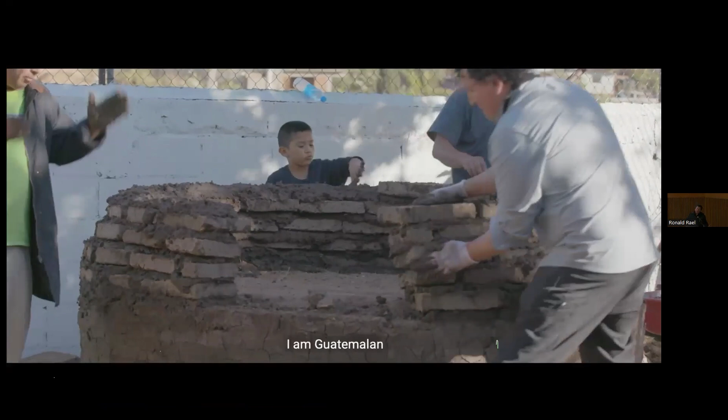I had the opportunity to build one of these ovens in a migrant shelter in Nogales, Sonora, part of a documentary film called Pedacito de la Tierra, which documents the construction of this horno, which allowed people from that community during the pandemic to have a little piece of home within that shelter. Some of them were there for almost 2 years.

Children were born there, and they could gather around this horno, people from many different countries and languages, to share stories and recipes and to create a community of their own. That horno is still in use, and they bake over 250 loaves of bread every 2 days in this oven.

Earth is an important part of my architecture practice, and several years ago I designed what was one of the first mud brick buildings to be built in Marfa, Texas, in over 100 years. A project that looked at both traditional and contemporary technologies. I call it the box house. It's a box within a box of mud and a box of infrastructure inside.

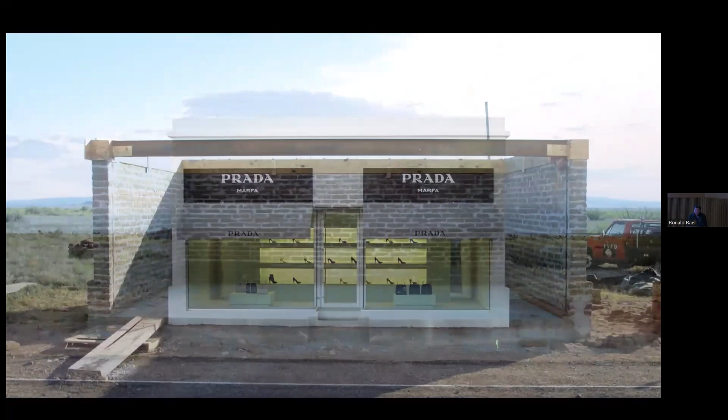And Prada Marfa, also nearby Marfa, a project that looked at the political implications of using earth as a material, each brick cast in a cementatious mortar, similar to how the US military constructed their forts along the contemporary US-Mexico border after the Mexican-American War in 1848.

And to think about how these works transcend their objectness as cultural objects when they enter into the public sphere and take on a dimension of cultural meaning beyond the object itself, beyond the architecture itself. Perhaps Prada Marfa was the first project that demonstrated to me the difference between architecture and art, but also blurred the boundaries between those two disciplines.

Much of this work culminated in a book I wrote in 2008 called Earth Architecture, that discussed how earth is a 21st century building technology, and discussed the contemporary history of earthen architecture. But in the last chapter of the book, I speculated on what would be the future of earthen construction.

I had many thoughts about this related to the internet and the dissemination of these technologies, but also in 2008, 3D printing seemed to be something that was catching on. And I thought 3D printing might be the future of earthen construction. Very quickly I thought, well, maybe I could be the person that does that.

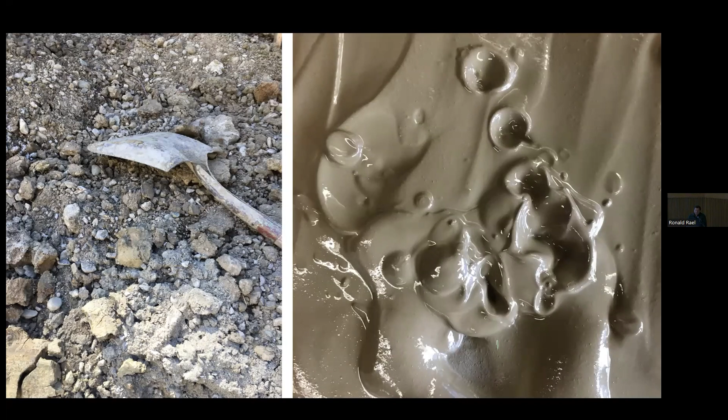That developed into a project where, working with the ceramics department at University of Texas, El Paso, and the geology department there, as well as 25 ceramicists from Juarez and El Paso, we embarked on searching for the clays of the borderlands and to have a discussion around the historical use of clay in that region, and to think about this idea of how earth connects us.

We developed a software so that anyone could replicate the techniques we were employing to make those pots, because a ceramic artist at that time especially didn't have time to learn how to 3D model and 3D slice and 3D print. So this is now a software that's sold and used in institutions all over the world, but it makes it very easy to make these objects.

With these ceramic artists, we collected the clays of the borderlands, and we thought each ceramic artist would make one object, but they ended up making 250 over the course of the project. These beautiful clays of the various complexions that were found.

These technologies developed into ways of thinking about architecture as well.

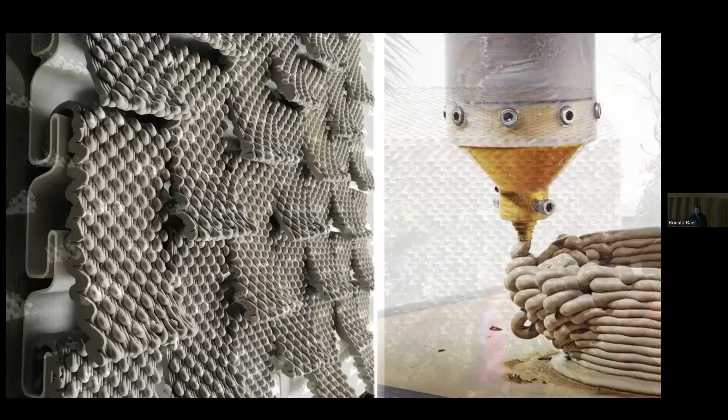Over 3,000 custom 3D printed ceramic cladding units for an accessory dwelling unit in Oakland, California, after the relaxation of regulations about not having to use an architect, employ an architect, or go before the planning board to build up to 1,200 square feet in one's backyard. It was an exploration of the technologies we were developing around 3D printing with clay, but also employed many of the other materials that were a byproduct of thinking about what materials exist in the landscape, in the same way that an adobe is made from the earth material around us.

In the San Francisco Bay Area, we could find sawdust from the Sierra Nevadas. We can find salt from the San Francisco Bay. We could find recycled grape skins from the wineries in Napa Valley to create a 3D printed facade using those materials.

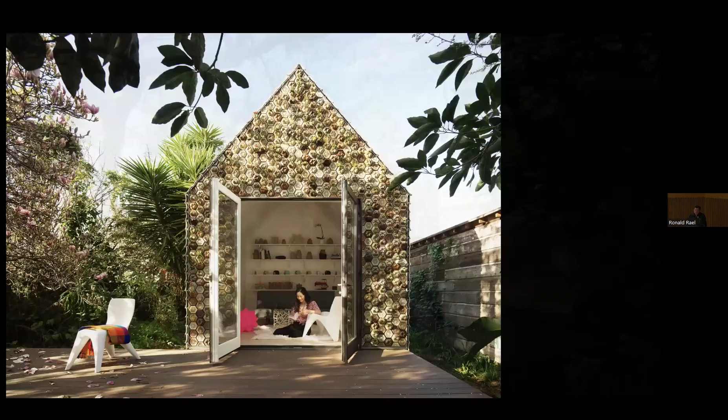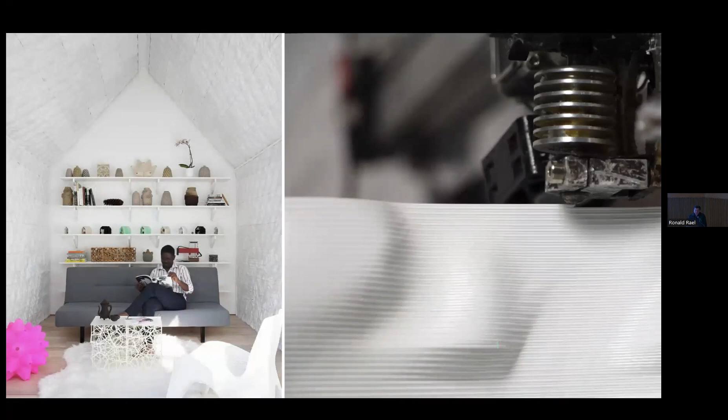Exploring the idea of how additive manufacturing could be employed in the making of architecture, exploring not only the building itself, but the furniture and furnishings within. A coffee pot made of coffee grounds, wine glasses made of grape skins, in a small transformative space that just explores the possibility of making.

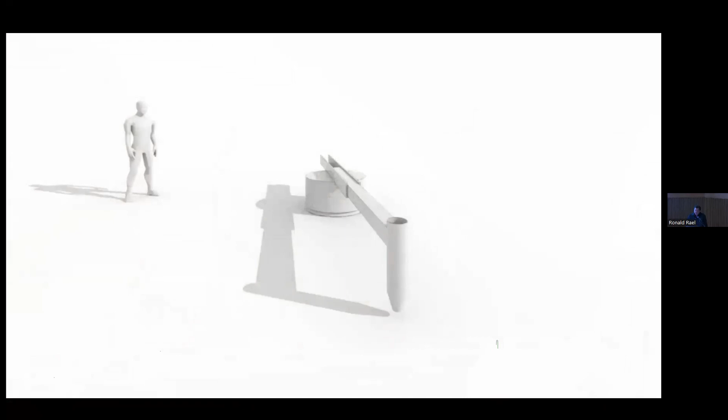But the goal was, since 2009, to think about how this could be scaled up. And that required not only the scaling of the objects, but the scaling of the machines, because this was the goal. I had the fortune to collaborate with a company that was making the same 3D printers we were using at the time, 3D Potter.

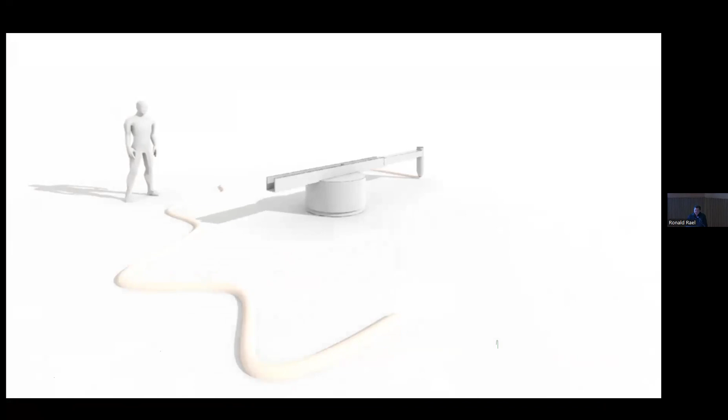I sent them this little sketch and said, could we make something like this? We developed this together, a very inexpensive 3D printer that could print ceramics and print a number of ceramics at once, but also could print a very large object.

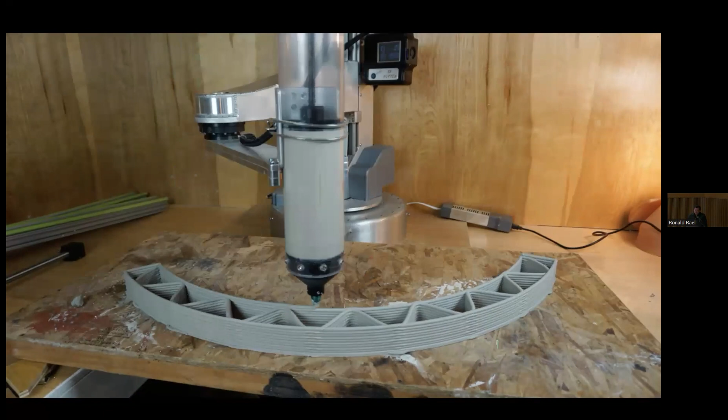We also had to think about how we scale the delivery of a material. That's a human 3D printer right there.

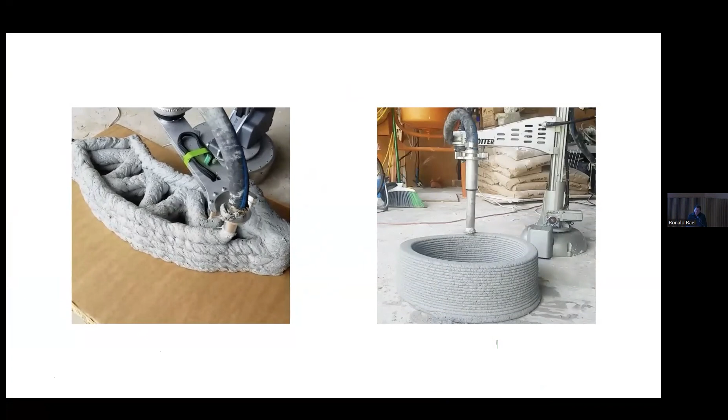As we progressed in developing this, we were able to 3D print with pretty great accuracy using soil material.

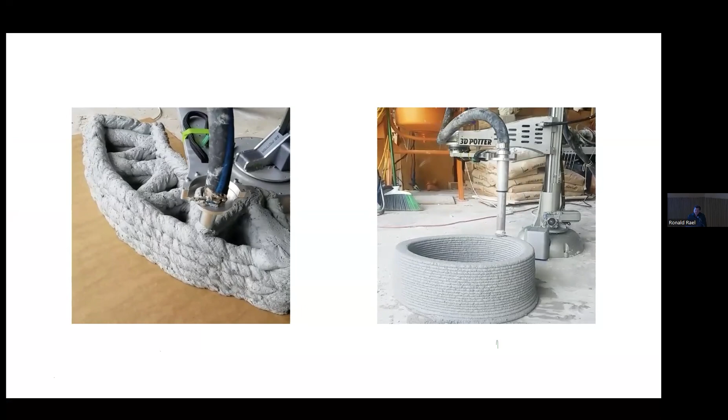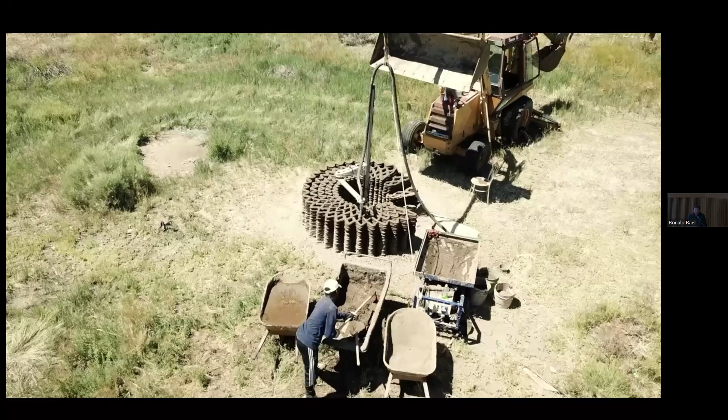And so when we had that confidence, we then embarked on bringing that technology to a remote location in the historic borderlands, to print for the first time on the planet earthen explorations of proto-architectural spaces and forms.

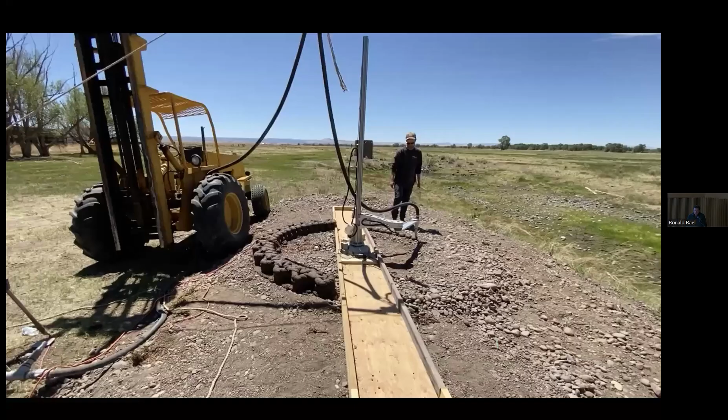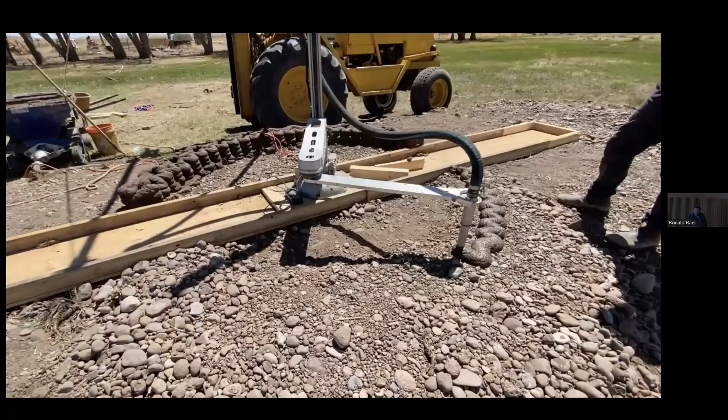Some of the many technologies we developed around that, very quickly, it was a very mobile and inexpensive printer that could use the material excavated right from the site. We developed different kinds - it's a 3-axis system. We developed a 4-axis just by being able to move the robot around, which allowed us to make multicellular spaces of rooms.

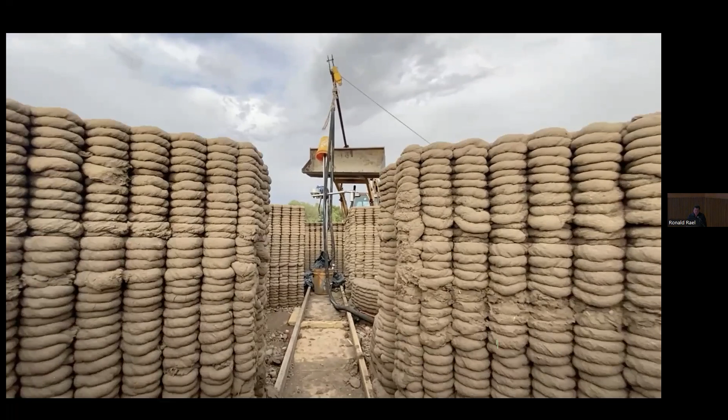Thinking about how we could print furniture, all driven by a cell phone.

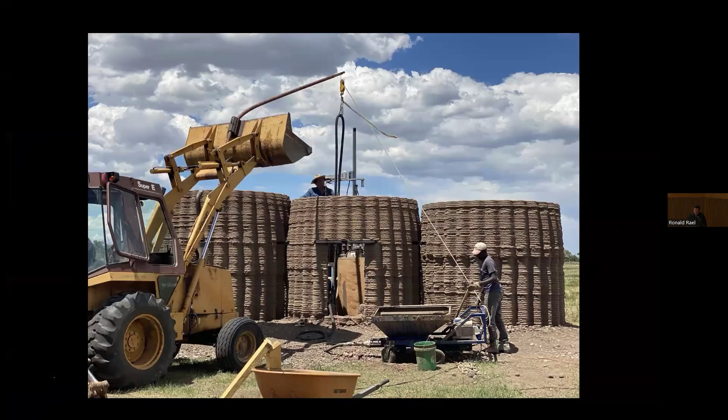The pandemic enabled us to leave the lab and explore how we could embark out into the landscape to take this kind of architectural research further.

The project we called Casa Covida. Covida is not really a word - it sounds like COVID, but also like a house for cohabitation in the time of COVID.

It's a 3-roomed house, programmed with a space for sleeping. Recognize those guys?

A space for cooking, using pottery that we also produced using earth from the site, and a space for bathing.

A lot of my architecture friends said, well, it doesn't have a roof. So we thought about, well, what are the ceilings in the borderlands? And often you see these aerostat blimps. So we thought that maybe a pneumatic roof would be appropriate for a 3D printed earthen building in the historic borderlands, one that imparted this quality of light into the space and was also like a cherry on top of a chocolate sundae.

That project led to a project called Skylos, Silos de Cielo, a project at a historic drive-in theater called the Frontier Drive-In, a drive-in theater that recalled its positioning within the historic frontera. On its reopening, we hosted a Borderlands Film Festival along with the opening of this project.

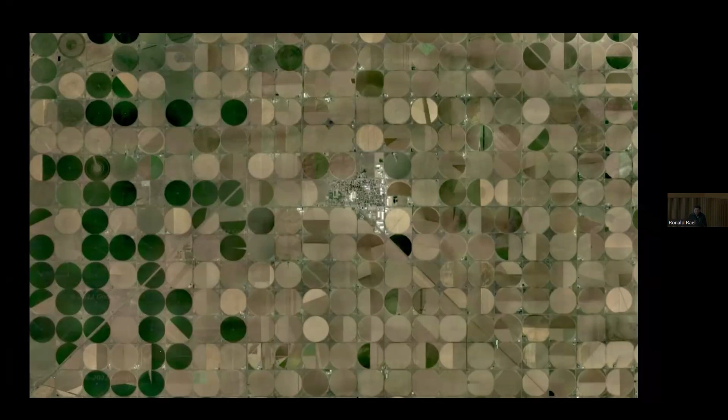And in that landscape are all these silos. So we created a series of silos that don't hold grain, but hold the sky, in this dark sky environment, allowing for the contemplation between earth and sky within these chambers. And it helped us begin to think about how we can develop this as an architectural technology.

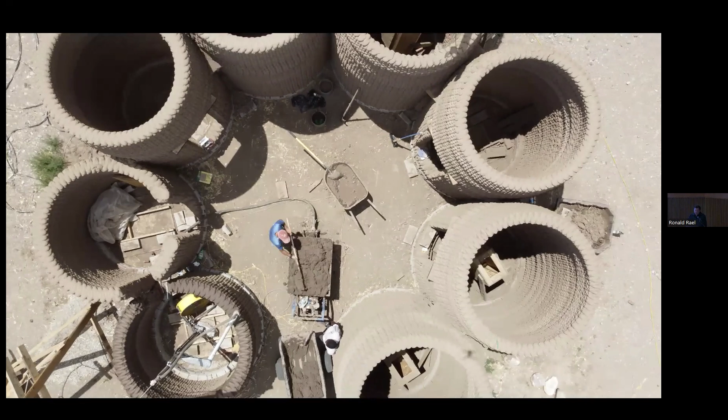It became the first 3D printed earthen building in the world to be permitted and approved by the local municipality, because it was a commercial structure. And it allowed us to think about how we can scale up.

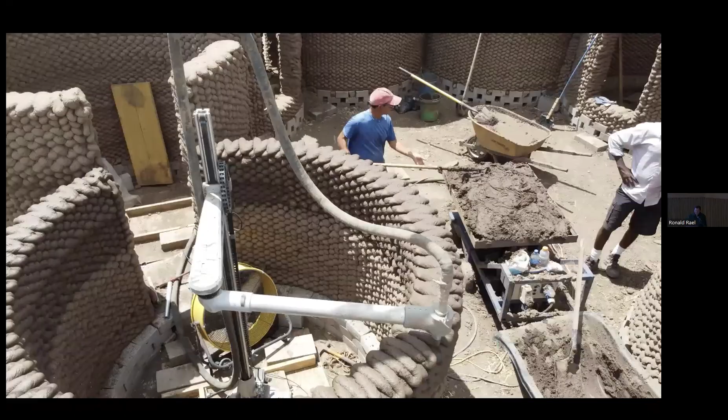And you can see the beauty of this. This is my very expensive graduate student there, just watching and dressed very nice. And the laborer's not doing much work either. The robot's doing everything. It's kind of like a security job. Nothing really exciting happens until something goes wrong.

But just a few views of that project, thinking about the architectural implications, it again somehow walks the line between art and architecture, really supported by the world of art, but has potential implications in the world of architecture.

This idea of building in the borderlands, prior to the current president-elect taking over the presidency, I had completed a book called Borderwall as Architecture, where I was very interested in the construction of the border wall and its implications as an architectural structure that defined and transformed the spaces along the US-Mexico border.

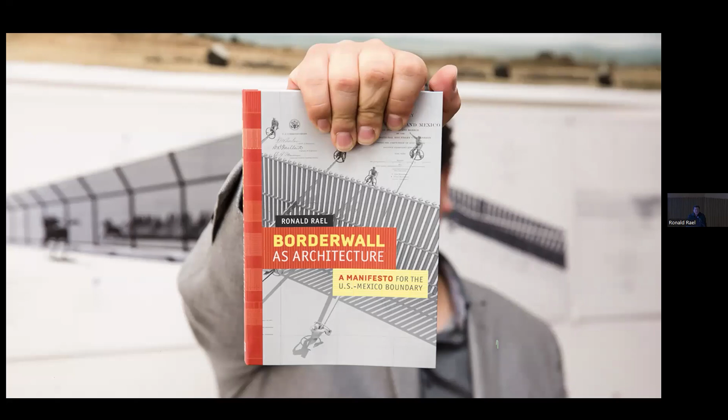The book was an account of the stories and the impacts that the border wall had on people, ecologies, animals, cities, and private property. It's basically a story of the 700 miles of wall that were built after the Secure Fence Act of 2006. To illustrate these stories, I created a number of objects that I called recuerdos, or souvenirs.

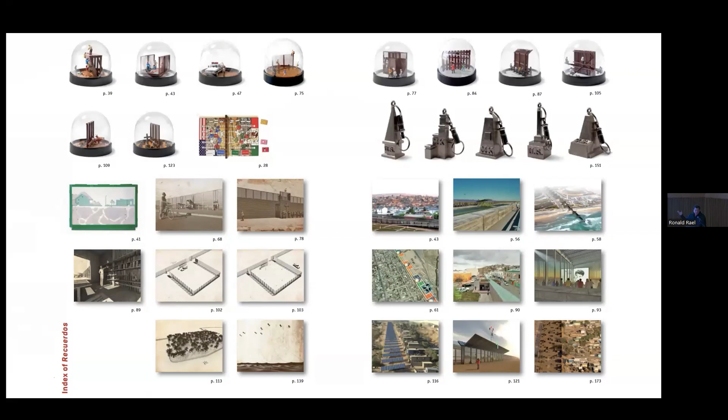These souvenirs told these stories, and I illustrated them through architectural models in the form of snow globe souvenirs, board games, ant farms, postcards, maps, keychains.

They told the stories of animals who were unable to follow their natural and historical migratory routes in search of food and water. They told stories of peoples whose resilience continued to allow them to come together in the spaces along the border to celebrate their binational heritage.

This is binational yoga classes that used to take place between San Diego and Tijuana before they built three walls to keep people apart in that zone. I've always felt they're doing the monument pose here. These monuments are what used to define the border prior to the erection of the wall.

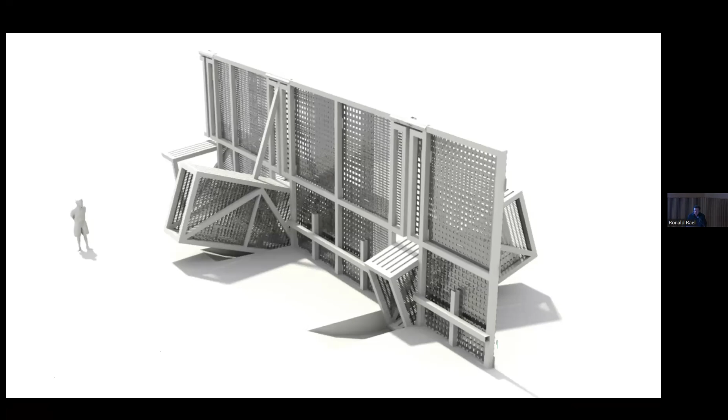A swing that allows someone to cross over to the other country before gravity deports them to the other side.

Something more close to home, cactus wall, which raises the questions of what it means to build in one of the most pristine and protected landscapes we have in the United States, Saguaro National Park, and what it means to think about an investment in the restoration of that park rather than its destruction through the construction of a border wall.

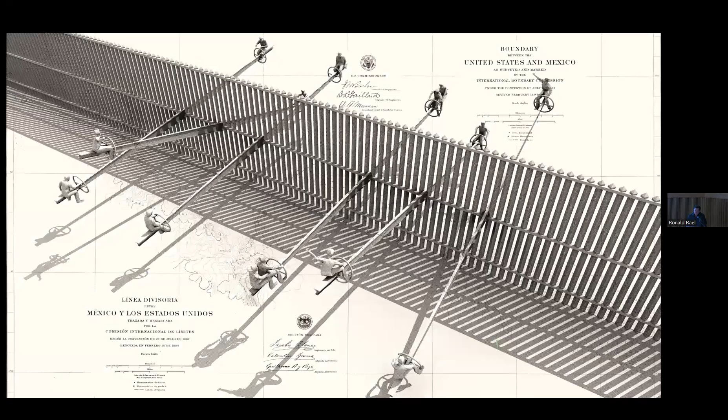One of those recuerdos was called Teeter-Totter Wall. This illustration, done in 2009, illustrated the idea that the wall was a metaphorical fulcrum between labor and trade balances and imbalances, between the imbalances between wealth and poverty in the United States and Mexico, and also the snow globe of that.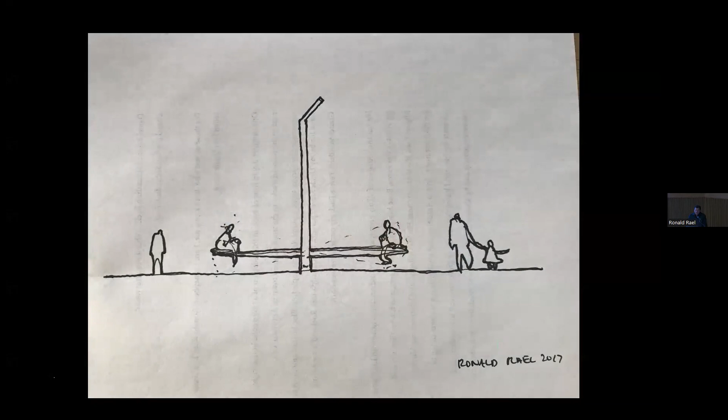In 2017, there was a lot of excitement around this project. It was getting a lot of attention just through the drawings, and of many of the illustrations that were created. I never saw them as projects themselves. I thought of them as ways of talking about the issues of the border, in this case, talking about those labor and trade balances and imbalances.

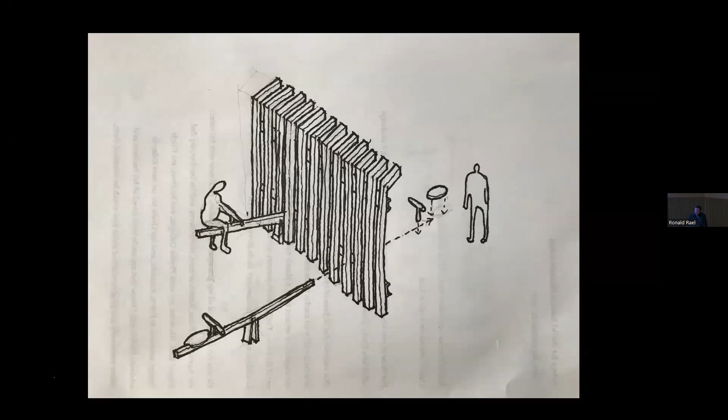What would it mean to actually construct this? I went through a series of exercises to imagine the possibility of building this, with actually no intention of inserting it on the wall. But I wanted to see it real.

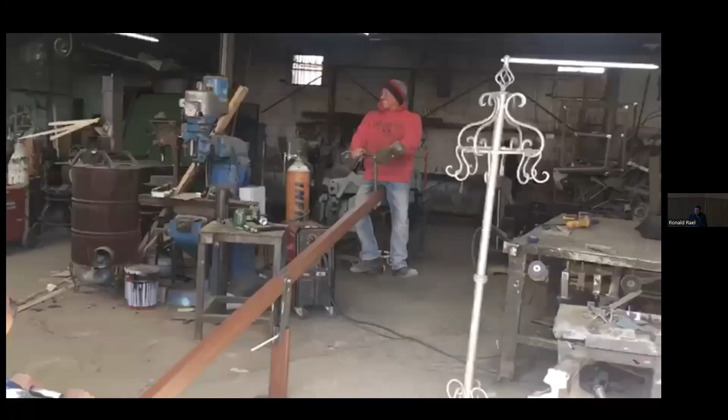I actually went to the border wall and carried large objects to see how long it would take to arrive. I measured the wall, imagined that a material in the vertical position divides, but a material in the horizontal position connects. And we fabricated this version of it in a welding shop in Juarez.

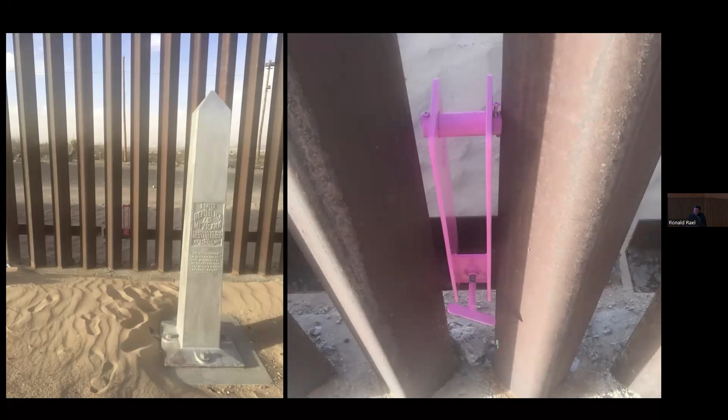And then we imagined, well, how can we smuggle design to the border? And how can the metaphorical fulcrum be an actual fulcrum? This became the actual fulcrum of the teeter-totter wall, designed to insert into the wall, thinking about all the logistics of the seats and the handlebars.

And what color should it be? Should it be steel, to highlight this notion of transforming the directionality of the material and the meaning of the material in its various orientations? Or should it stand apart from the wall itself and the violence of the materiality that it suggests?

We went through several color schemes to imagine what it was, and working with a group, Colectivo Chopeke in Juarez, we finally settled on pink. Because pink in Juarez reminds us of the women who were killed during the time of violence when Juarez was the most dangerous city in the world. We wanted to acknowledge that the border is a site of violence, and that while we were thinking about highlighting these issues in the form of play, there was an underlying issue that is more important than that which happens on the surface.

With so much talk about child separation and the construction of new walls during the time that the current president-elect was president, we decided one day that we would simply host a humble event with the children and families of that site. This is how the day unfolded. It was a 40-minute event. We had been traveling to this site for over 10 years. We knew these kids.

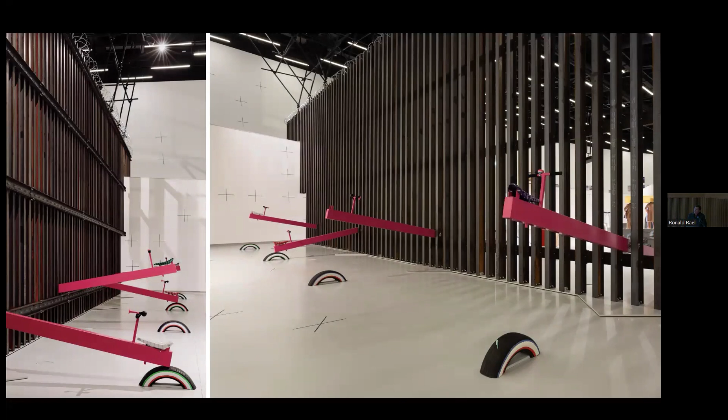And I laid down one more condition, which is I have an optimistic view of the future in which we dismantle that wall. And what do we do with the millions of tons of steel that were used to construct that wall? So I asked, after the exhibition, can we use this as a way to create a study model for a house using that material?

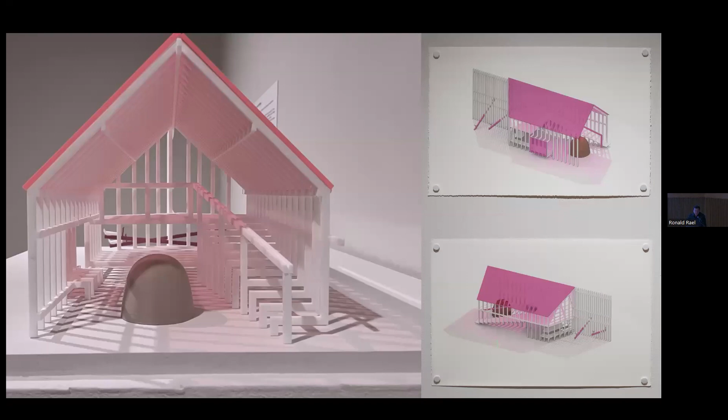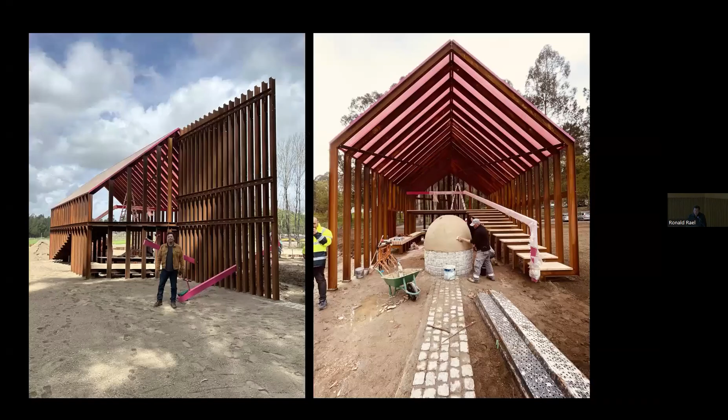And they said okay. So we were able to take this material and we designed a house called Teeter Totter House. We included a horno because it was built in Portugal, where the oven continues to be used today, but it also migrated from there across the Americas and is used today here. We transformed this, it's even crazy for me to look at it now, into this, using all the same material from that installation to make this teeter-totter house in a public park in Braga, Portugal, where there's a large migrant community that works in a local steel factory. And they use this as a place to gather and hang out, and even sometimes to cook bread.

They make really nice hornos there in Portugal.

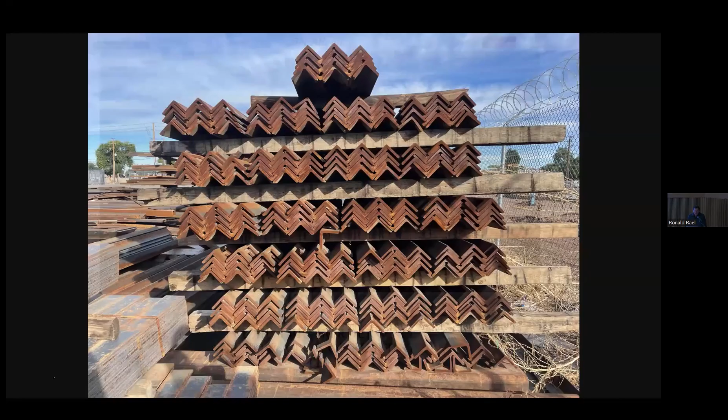When Biden became president, on his very first day, he stopped all border wall construction. Do you remember that? And all these construction workers went home, and there were millions of tons of steel left alongside the border for the taking. And so with the help of Arizona State University, we actually smuggled 10,000 pounds of that steel into the galleries to create a house.

These are the units we smuggled. They're the horizontal pieces that hold the steel pieces that are at an angle in the verticals, to create a project we call Casa Unida, a project that uses 2,000 pounds of this steel and slowly lifts up the veil. It feels light, like a feather and a wing that brings light inside the space, that takes on this idea of welcoming and a place for gathering.

If you've been to that gallery, there are two galleries. In one gallery, we built Casa Unida, and in the other gallery, we built Casa Dividida, House Divided. House Divided grew out of one of the recuerdos that spoke to the notion that the wall doesn't divide two landscapes, it separates one landscape. On one side, it might look like this, someone's mowing the lawn in the backyard. And on the other side, the wall serves as the fourth wall of someone's house.

We created a set of blueprints called House Divided. On the right side, you see the average size of a house in El Paso, Texas, and on the left side, the average size of a house in Juarez, Mexico. You see the different dimensions of the rooms, the different building thicknesses, the space requirements, but you also see the wall dividing the bed in the bedroom.

In the opposing gallery, we built the bedroom. A bedroom that describes two spaces that are so close yet so far apart, the things that we hold in common and the things that make us different, the traumas and the troubles, the bills and the pills. It's filled with, I don't know, you see the crucifix cut in half. The fabricator didn't want to do that, but ended up doing it. The have a little faith pillow. The ceramic pottery on the wall, on the deer skin, on the kind of Native American motif, the trastero, the cupboard in the picture, photos of family.

And we used this as a space that we invited people who had been separated to actually spend time in and come together. This is a mother and daughter who had been separated for many years.

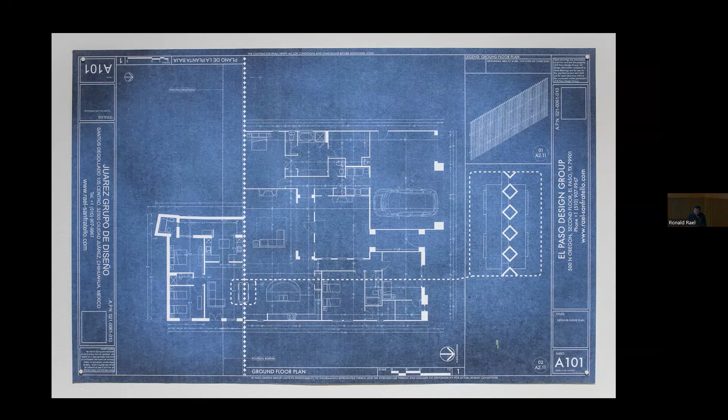In House Divided, there are two rooms. And here you see the wall dividing the table in the kitchen. There you see the actual cupboard filled with the foods of that particular side. You see the actual pottery on one side. You see the stains and the droppings and the grime and the grit and the textures and the architecture and the difference between the two.

We developed this project with a group from Juarez called the Border Architecture Laboratory. Many of its members were also from Colectivo Chopeke, who helped us with the teeter-totter wall.

This idea of making, or thinking about how architecture can be a medium for art, or that art can heavily influence architecture, is something that continues in the practice as I push the idea about how we approach architecture or approach ideas of making homes.

More recently, I began to wonder how we can transform traditional technologies in different ways that might advance the way we think about construction in the 21st century.

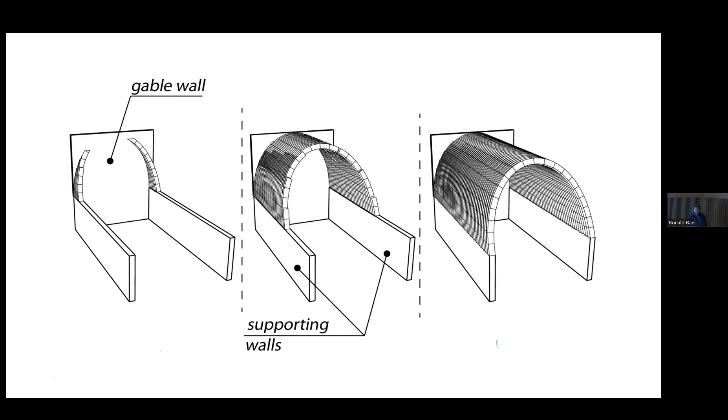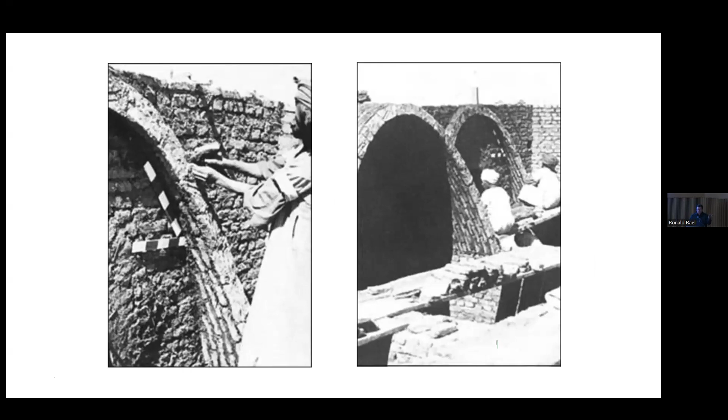There's a very ancient and traditional way of building a roof out of mud, developed by the Nubian culture in Sudan and southern Egypt. The wall is built, and you simply lean bricks against that wall in the form of a parabola, allowing them to extrude out to make a vault. And I wondered if a robot could do this.

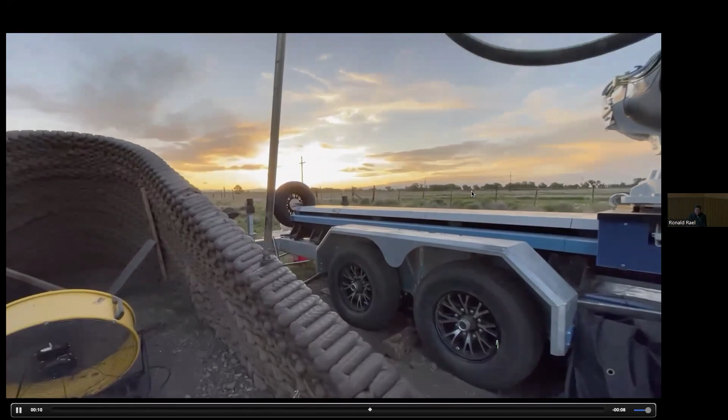So we embarked on a series of tests to see if it was possible for a robot to produce those same kind of angles. We couldn't do it as steep, because it's actually extruding a very wet material instead of a dry adobe brick. This pattern allows for friction, so this layer above holds next to the layer below, since it's at a cantilever.

The textures allow the interlocking of the material with friction, but it actually slows down the movement of rain across the facade. It's also an ancient technology, creating texture on an earthen wall so rain doesn't create a small river eroding the wall faster.

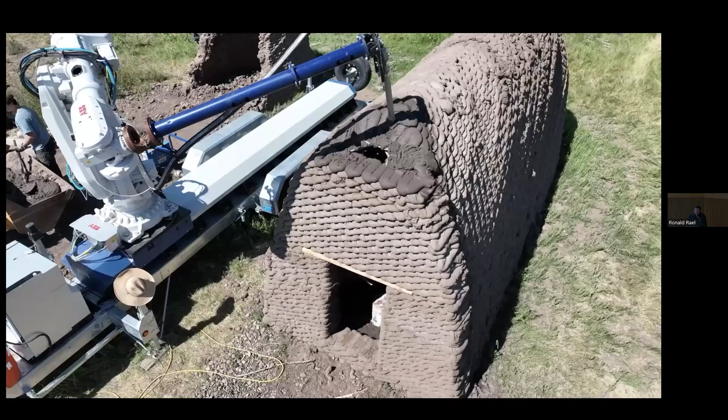And we're able to achieve the first 3D printed roof in the world. And not only that, but made out of mud.

Here you see the final closures of this. Maybe I can fast forward a bit. The beauty of this is that it's using earth harvested right from the site. You see my then 12-year-old son managing the mud. I'm flying a drone while driving a robot, and we're building a building.

And this is it, a small, humble test that maybe has implications in the making of architecture in the future, because it certainly had implications in the making of architecture in the past.

So I continue to push, and it's really my focus now to think about how we can bring this technology into the making of architecture.

This was made this summer. It was the biggest single thing I made, mostly by myself. I had some help early on in the first couple of feet, but it was like one person making this object over the course of a couple of weeks.

And all of this is leading to a project I'm embarking on now called Muddy Robots, the combination of mud and robots, exploring AI, ancestral intelligence, additive intelligence, and artificial intelligence, and how those three can come together to think about how we can reintroduce Earth as a 21st, 22nd century material.

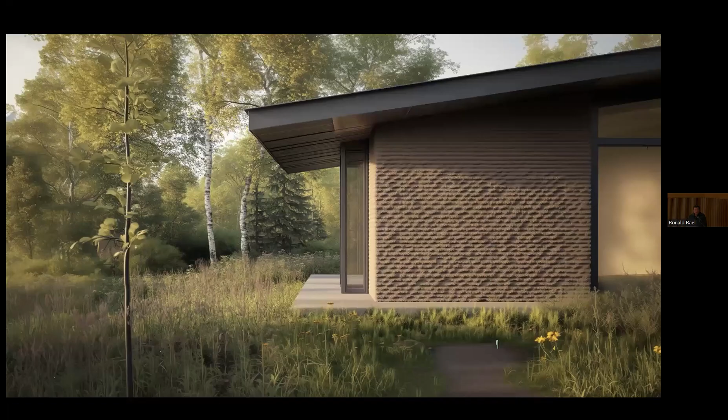And how can we begin to imagine spaces that might be familiar to us in the way we might live today? And how can we imagine spaces and forms that take on the potential a robot can produce, new kinds of textures and possibilities, new kinds of forms and surfaces.

So that perhaps one day soon we can reimagine our lives as being integrated with a building material that mankind developed over 10,000 years ago, the most perfect building material we can imagine moving forward. Thank you very much.